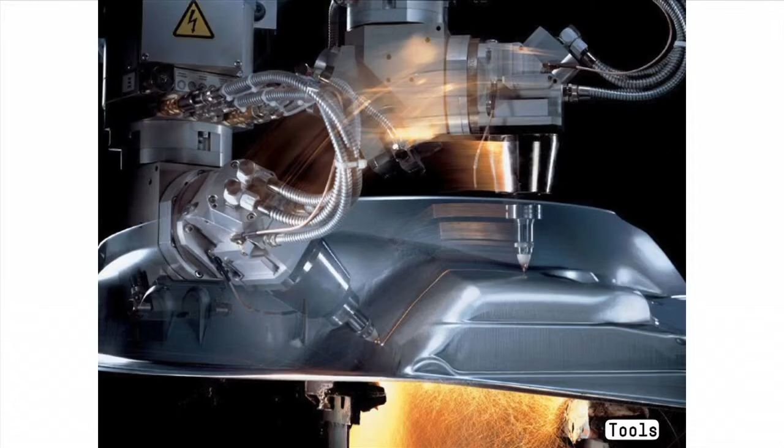To begin with, about 10, 15 years ago, as we were working in this sort of high-tech German environment, we began to learn more and more about the tools that were being produced in the factories we were building. This is an example of Trumpf, a machine tool company in Stuttgart that we were building for the last 10, 15 years. Their great invention was laser cutting of sheet metal, but also digital bending and punching, and we began to think about how we could use these kind of tools for producing architecture.

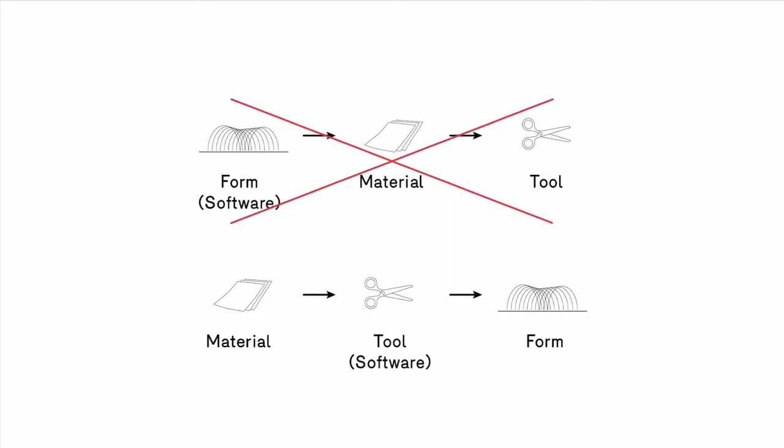So in a way, as I was sort of hinting at, there's this reversal of the process where when we were students at the GSD at Harvard back in the late 80s, when software was emerging, the process was working this way. You'd start with a form from software, Form Z and some of these things you remember, and think about how a form could be materialized in tooling. So the way we work now is really a reversal of this, where we'll start with the material, begin to look at tools, and many of these tools are sort of driven by software that would lead to types of form.

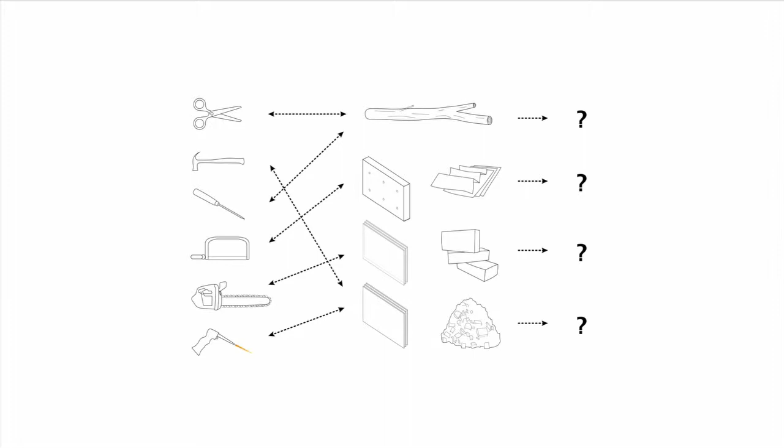So the idea was this, in this kind of diagram here, looking at different tools, beginning to anticipate how they can, in a sense, transform or manipulate materials and where that might lead us to. At the same time, we keep adding fabrication partners. We started with Trumpf. In the meantime, and in relationship to particular materials, we keep gathering different fabrication partners that help us understand what their processes do and how we might, in a sense, exploit these or begin to use these for architecture.

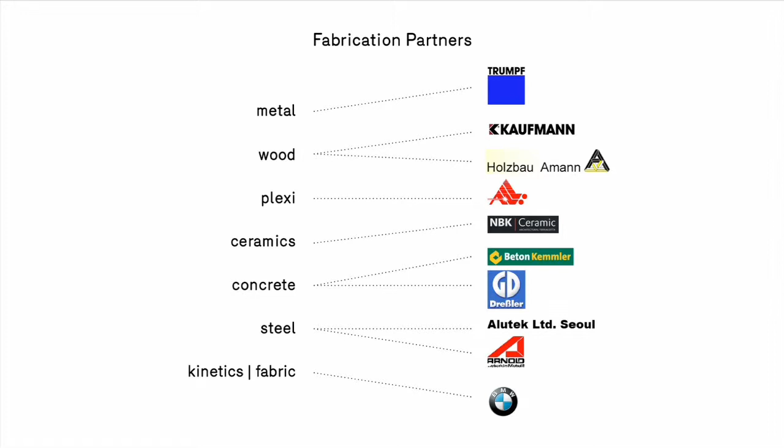At the same time, some London-based, German-based engineering partners, we began to work with them very closely, and particularly up front in the design process, where we're working with these guys very much at the beginning of the process. In order to do some of the more experimental work, we've also acquired a number of different institutional partners who have helped in terms of, say, collections or even the exhibition that we have here, installations, gallery expositions in order to test different sorts of ideas.

As indicated, this idea of the Atlas of Fabrication, which we did, I think this was about 3 years ago, we began to formalize a lot of these techniques into a kind of catalog. It's a catalog that we continue to add to. We're doing the second edition of this in a few months with the AA. But the idea is not to show buildings per se that we've done, but to focus more on different process techniques and how these might become an archive.

So this was work that we did with students. We would send students off to different companies. They would look at different material processes, in a sense beginning to archive this work, or to become our own sort of experts in terms of producing building catalogs that we could use or not use depending on the projects they can contribute to. So yeah, as an American architect, this was very different than the way that we were trained, where we were using building catalogs basically to add to the buildings that we were making.

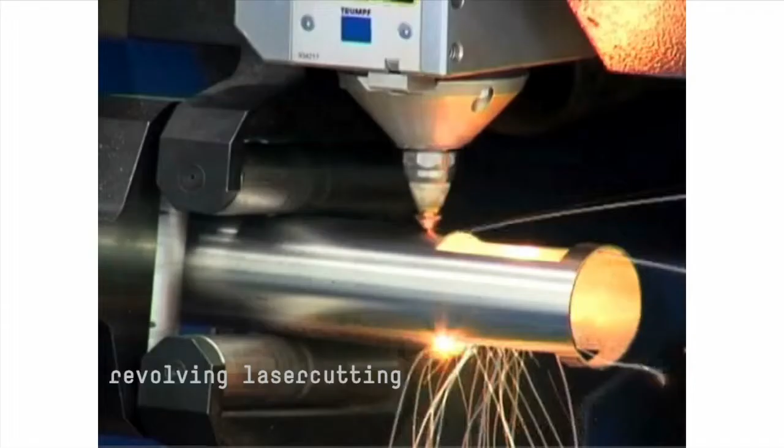So to give you an example of one of these processes, revolving laser cutting is something that Trumpf developed about 6 or 7 years ago. These are pieces that are upstairs in a way. These are, again, students coming down and really just experimenting with these machines to understand the capacity of these machines, how fast they can cut, how much detail we could acquire, to begin to understand the economics of some of these cutting, and then to slowly begin to think of applications for this.

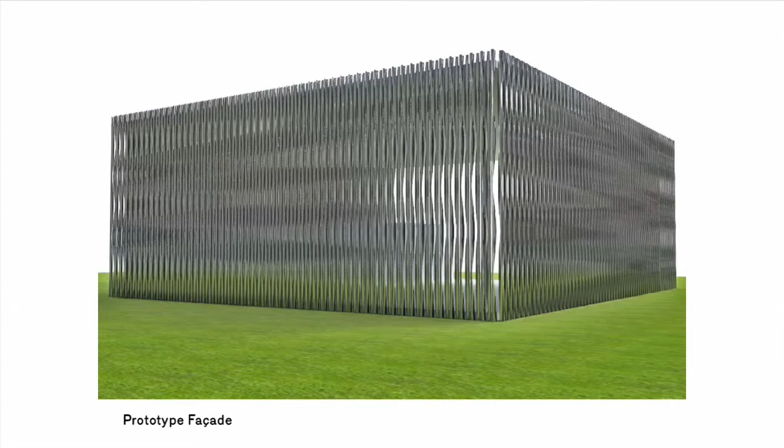So in this case, we constructed an array of these cut tubes for an exhibition in Basel, in Switzerland. The next step being a direct application in a building process. In this case, these cut tubes rotating both as a kind of sun control system for a showroom in Sweden, at the same time having a formal performance aspect, but also as a way of showing the machines that would be displayed in this showroom. So this would be kind of a fairly compact process of how that might work.

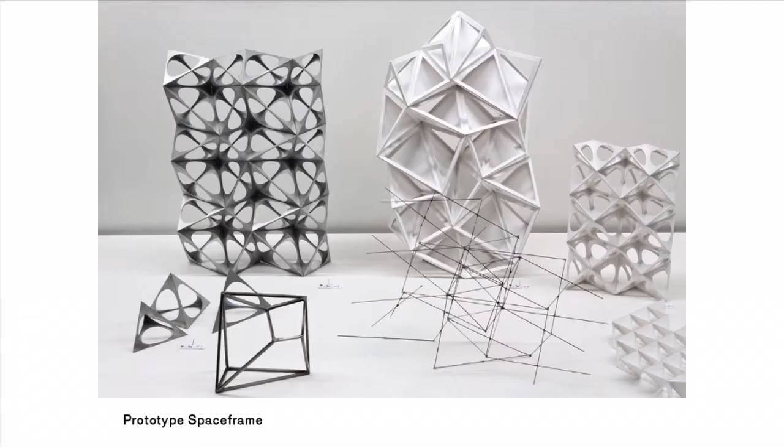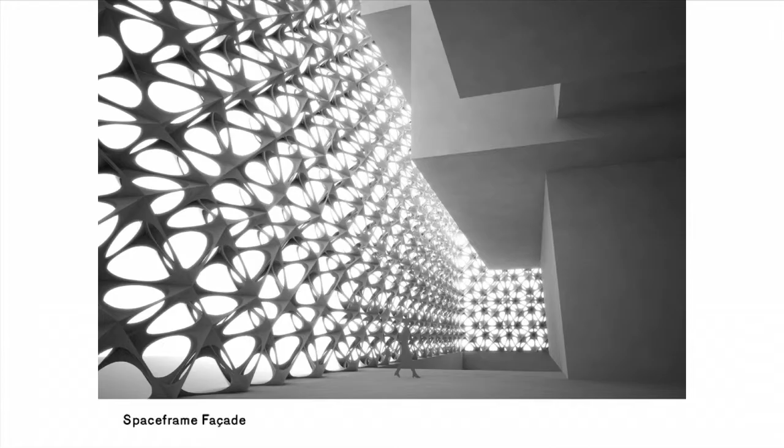Other examples, space frames. As I said, we're doing competitions in Europe, and one of the ideas is through a competition process to really embed some kind of a research project in each competition. So in this case, we went back to the 60s and 70s. We looked at how space frames were produced. Now these can be done parametrically. They can be done through laser cutting to produce, in this case, a study for a space frame facade for the Kunsthaus Museum competition in Zurich. But again, as a way of having that as a kind of project within the larger project of the competition.

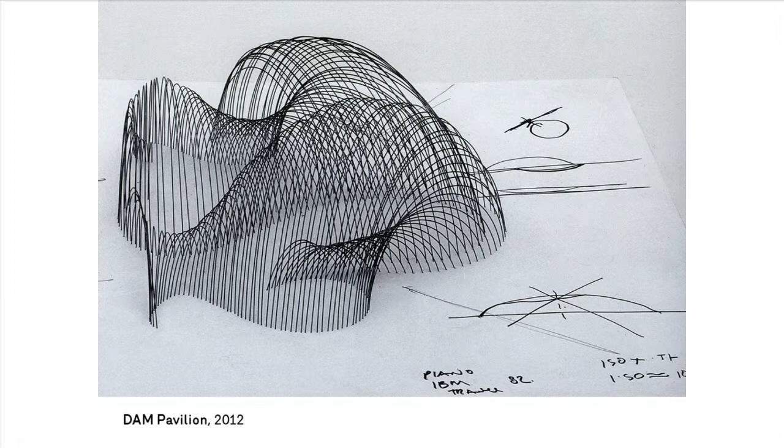Another thing about this time that we discovered with the laser cutting was that they could laser cut in a kind of spiraling cut that would lock these tubes together at the same time, could produce a radial system that we could adjust. So knowing that, we began designing different forms for the German Architecture Museum, for a pavilion for them in their garden, knowing that we could, in the end, use digital bending to produce a whole array of tubes at different radiuses that can contribute to these forms. We ended up working with Werner Sobek, making the forms, looking at different versions of those, and then thinking about how we could clad this system.

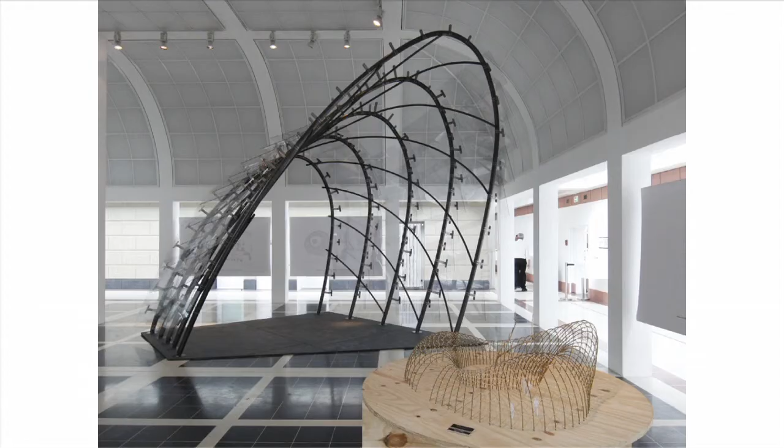In the end, Werner developed a system, a kind of polycarbonate shingle that were attached to these sort of standoffs here that were then simply and very quickly attached with Velcro connectors for a pavilion that we could build in the garden. This being the museum at the German Architecture Museum by Ungers, and this showing this sort of shingle overlap, which were then later embedded with photovoltaic cells for the piece.

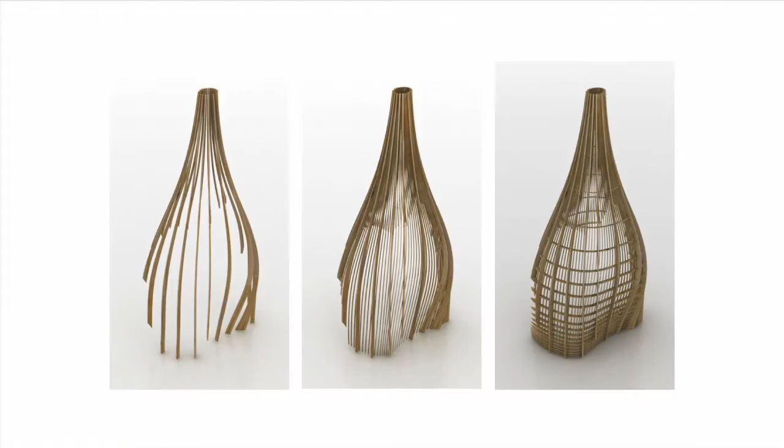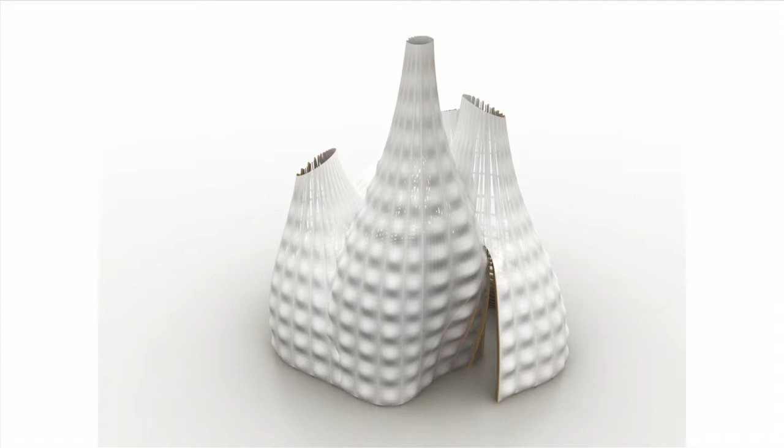Another test about this time was with wood construction for a pavilion in Norway, using the Norwegian wood industry to produce CNC cut ribs that could produce a series of cells for a Norwegian artist, which she could use and add to over time. The idea, working with this system with Holzbau Amann in the Black Forest, was a series of cells that could be clad with different ideas for membranes, either ETFE or fabric cells, of a system that we could add to and change relatively quickly for this exhibition.

So in this way, it was a very simple rib system with cross bracing through this, but with the idea of the cells being overlapping conditions. The pieces themselves, she could use these spaces for different kinds of installation having to do with the senses.

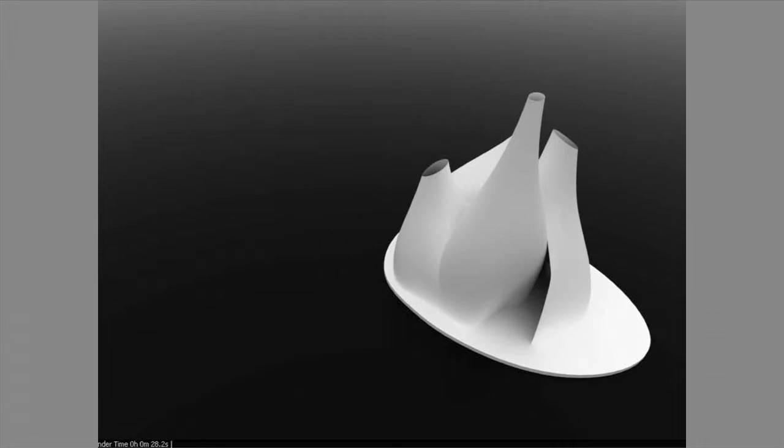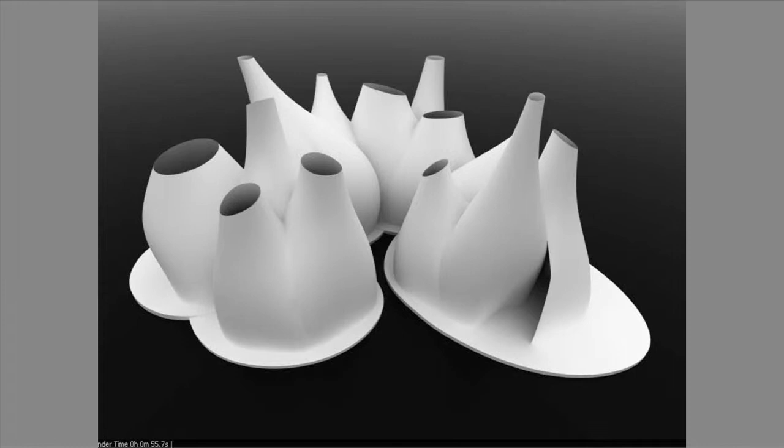The idea was that every year there could be another cell added to the project, so that within 5 or 6 years she would have an entire array of these pieces that would be interconnected to each other spatially. So the idea of the cell in a way as a kind of one-off, but one that could overlap and be connected to a much more integrated and, in a sense, integral system.

At the same time, and this was a discussion we had in St. Louis, I guess, in the spring, was the idea of patents, where we actually end up inventing components for certain projects that have to do with our prototyping. This, in this case, was supporting our friend Tacita Dean, who did the project film for the last Tate installation for the Unilever series. In this case, Tacita has a commitment to analog film.

At the same time, she was interested in the idea of using masks in an analog camera to produce certain effects with this project film in terms of overlapping of images. As you see indicated here, even in a way sort of rhetorically showing the sprockets on the side, would talk about this kind of history of analog film.

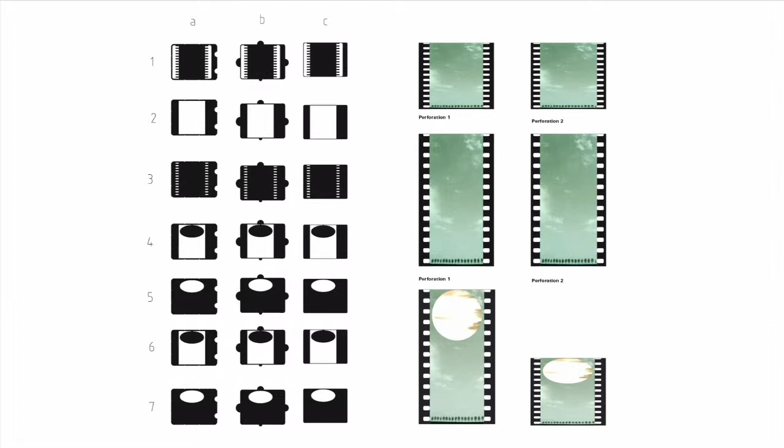In our case, to support her, we developed a series of 3D printed film masks that would slot perfectly into the camera, that would allow her different techniques for masking or revealing different kinds of images. So this is the piece, which is a kind of plastic 3D printing, which you'll be familiar with, which were then painted matte black and then could fit, sort of slot into the existing camera frames in order to produce these effects.

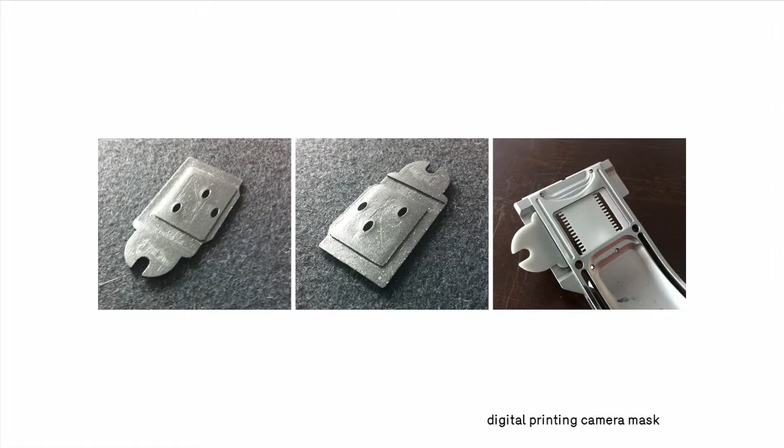The next part of the presentation, I think we're kind of okay for time, probably. Fine. Brilliant. Fine. Okay.

For example, I think in 2007 we finished this project in Korea. We'd never built in Asia before. It was a completely foreign building culture to us. This incredibly interesting, very heterogeneous city and how we might work there. Because we were building in a new master plan that was literally being built before our eyes, we became interested in how in a kind of core and shell building, an office building,

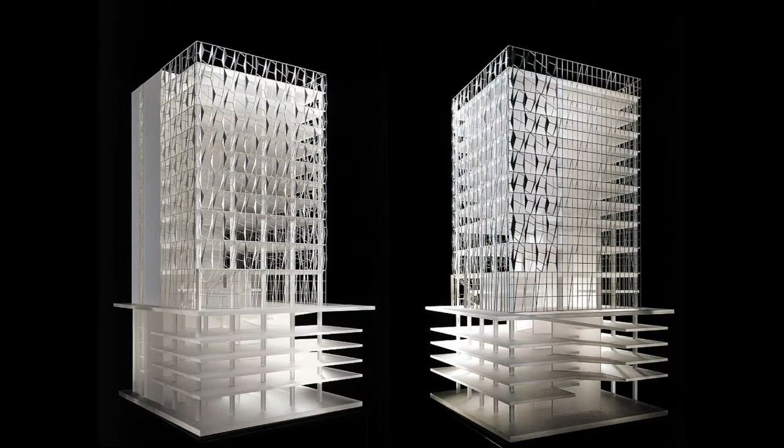The building itself that we were going to marry this facade to is a core and shell building with an offset core here in the corner, underground parking here, and then a facade on a steel building that we could simply wrap around it with showrooms on the lower levels and offices above, and then continuing the facade above to produce a kind of roof garden.

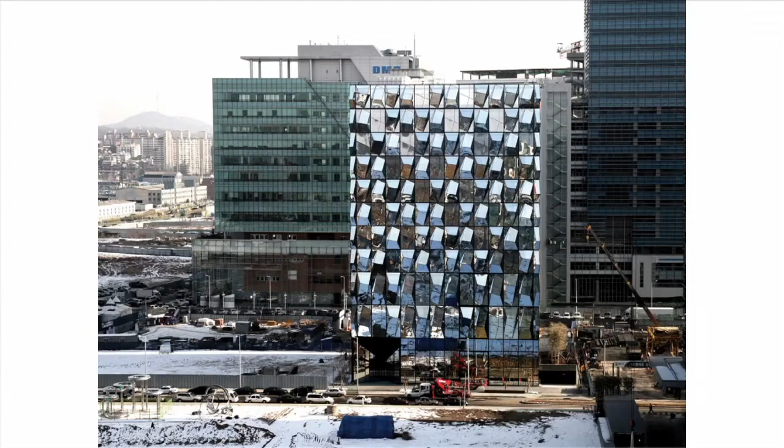So here's the building here. Here's this master plan that's literally being built from left to right, one lot at a time. And then this is the context, which we had very little idea what it was going to be, but with the idea that the building would react to these new buildings around it, whatever came up, as well as traffic, people moving around, the weather, whatever.

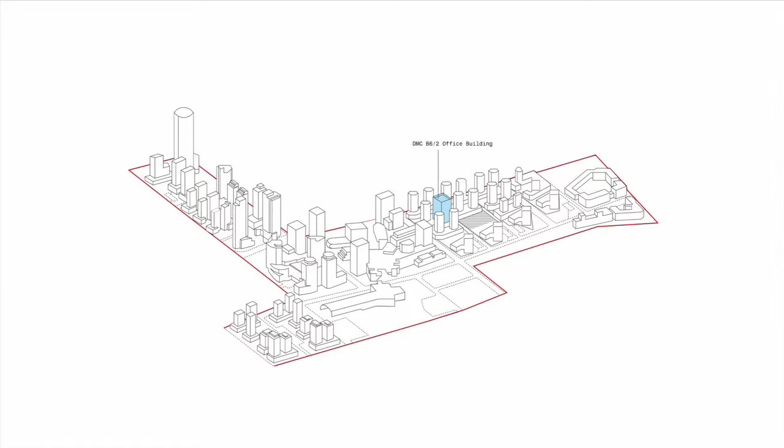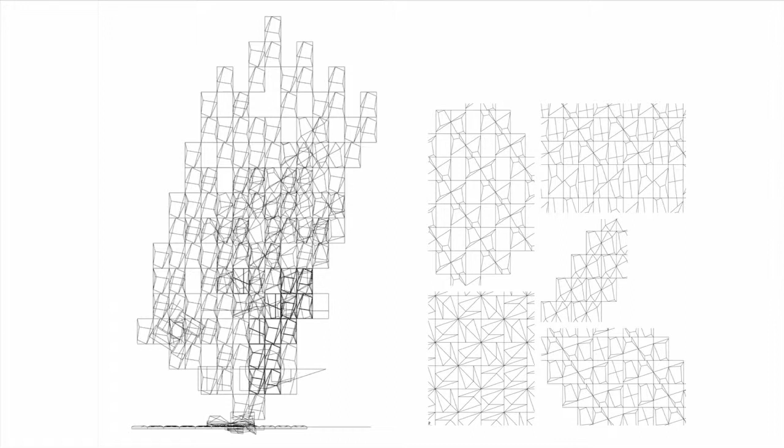So the building here being located here again in this fairly sort of mashup of a master plan in northern Seoul, and then begin to look at ways of using limits of glass. The glass is from Viracon, from Minnesota, from the US. We knew that we had a limit of the format, so we began with a grid, began introducing diagonals.

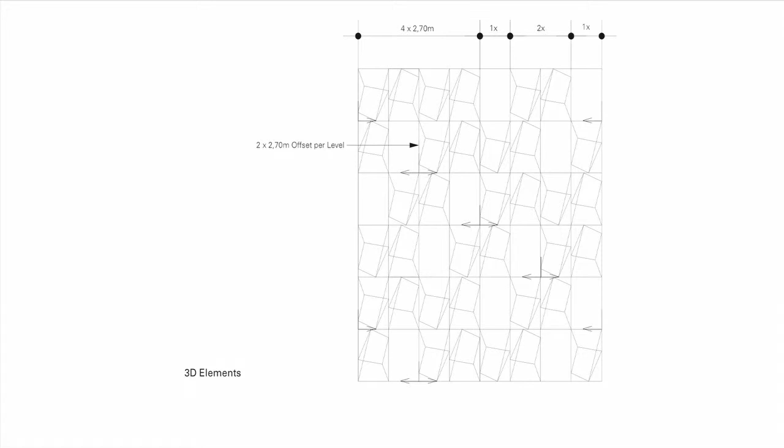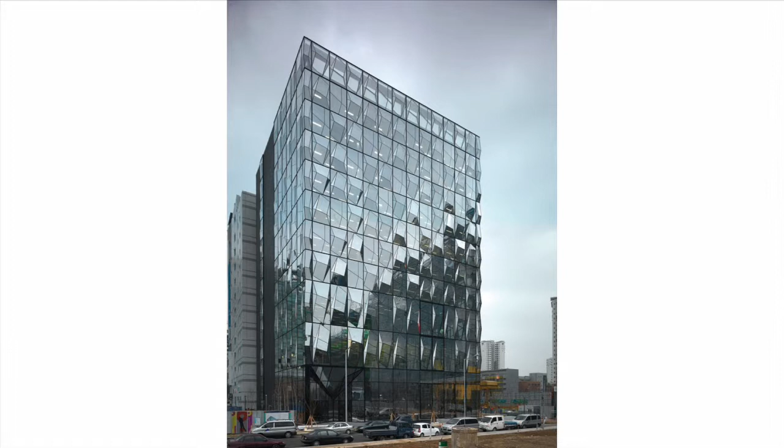Then the next move in this system was combining, and this also had to do with the economics of the project, but combining three-dimensional elements with two-dimensional elements that allowed us a huge amount of variation in the facade, while at the same time using really only 2 types. One like this, a three-dimensional type, which we could then flip upside down, and then combining that with a two-dimensional element to create a highly textured facade that works sort of optically very dynamically, but within a depth of only about 20-25 centimeters in the whole piece.

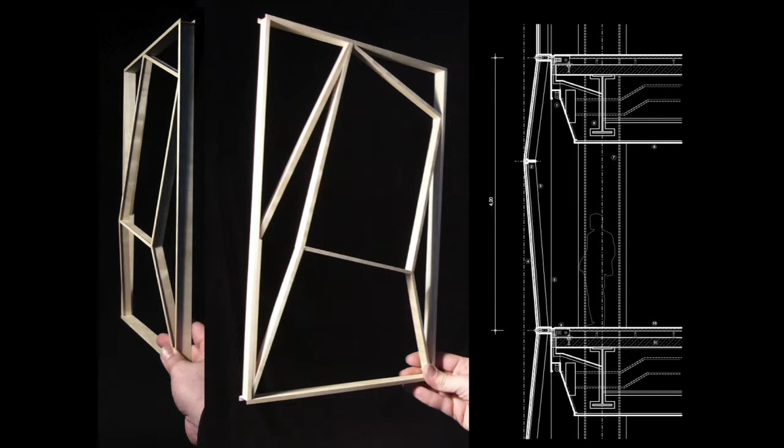Despite all the digital sort of working of this, we ended up going back to the shop and just producing wood models by hand, simply to understand the geometry and how these pieces could intersect, and how we could build them again relatively simply, and then combine them with glass elements that would fit in here. So this is again the kind of section depth that we were working with. Again, we were very interested in the history of curtain walls, how we could produce that for a low E reflective glass, and then how we could control the geometry.

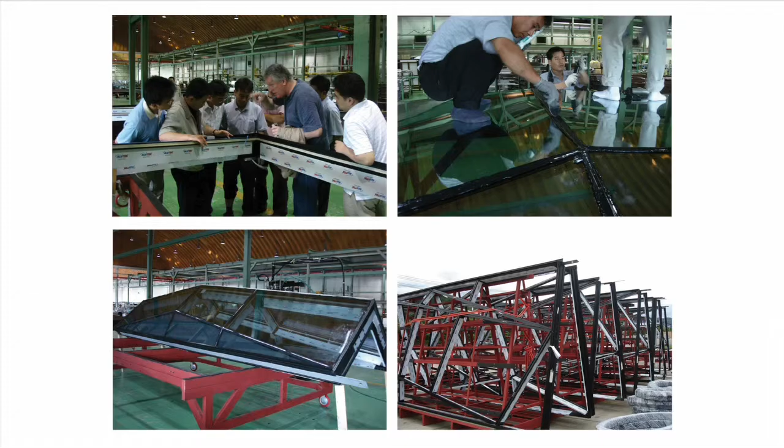We ended up working with Arups Hong Kong, who in a sense did workshops with the local fabricators. Jerry from Arups doing workshops in terms of controlling quality, tolerances, and then bringing the US glass onto these frames. So very high-tech CNC cutting versus very simple sort of kitting of those joints for silicone. A combination of, again, what was sort of at hand, what made sense in terms of producing this, being one of the more complex corner units that we produced. But I think there's both the ambition and the kind of will from these fabricators there to do something like this, in the sense that there was no precedent for this project.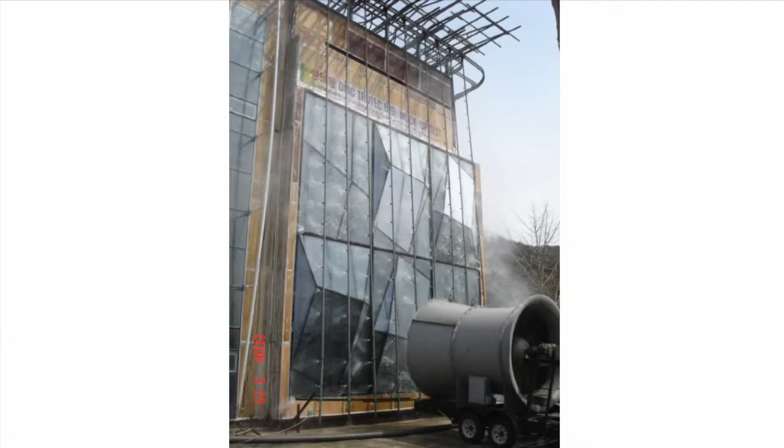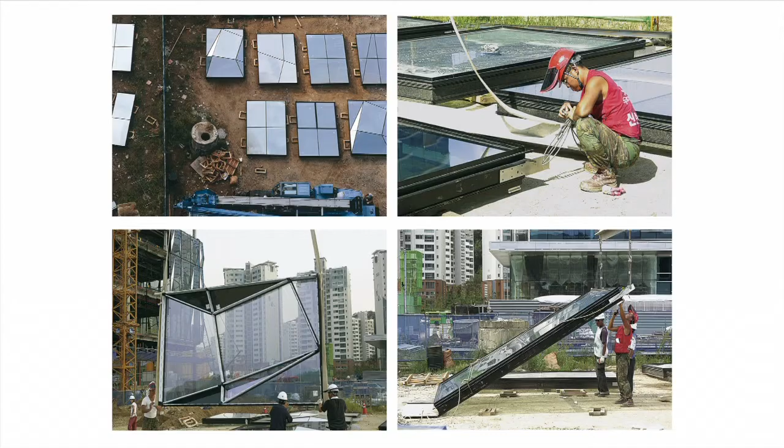The client asked us to test it, which we did, in terms of wind and thermal insulation, waterproofness. The first prototype passed, so we were given approval, and then could go into production in terms of prefabricating these things off-site, and then bringing them on site so that they could be lifted in place, even though some of them are quite huge, but we could lift them in place very quickly. So again, a Korean construction site where being on time, on budget was extremely important, like everywhere else, but they were able to do this in a very expedient manner, to produce something for us which was quite extraordinary, both in its appearance and even in the precision of how it could be produced. Again, a kind of technical solution at the same time.

We were very much aware of the effects this facade would produce, how it would react to traffic, to movement, to changes in light and weather, or even the insane window washers, which sort of drop off this thing. As well as different projects. I think another idea was working at different scales within the project. So we were working on wood cladding systems on the interior, a suspended steel stair that we engineered with Schlaich Bergermann in Stuttgart, but different sort of emphasis within the overall project.

Having done that, we went back to Stuttgart to do a couple projects for Trumpf. Again, this is this digital fabricator, the machine tool company that we started with, where we did a gatehouse for them, which was our first chance really to do a building that would, in a sense, embody all of their technology. We went back to Werner Sobek's office, and Werner had been dying to do a building with an insane cantilever. We had columns over here, which he just knocked out literally of the model and said, we're going to do it like this. So our first column grid is back here. The other one's here. There's a gigantic chunk of concrete in the ground to keep the whole thing from tipping over. And then produce this 60 centimeter depth steel roof truss.

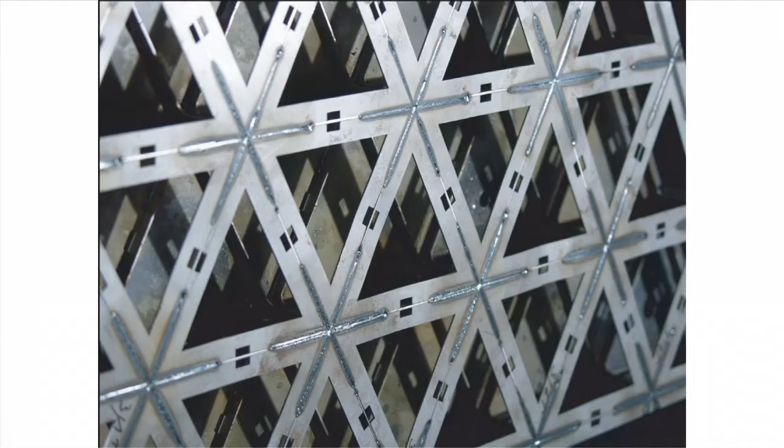To begin thinking about that, we knew that Trumpf were producing these things for ship decks and tables. This is laser cut and laser welded. It's an extremely stiff, extremely strong building component. So our idea was, well, maybe we could take this technology and scale it up to the size of a cantilevering roof, which was a lot easier said than done. We inherited these sort of diagrams from Werner's office that showed the loading.

We wanted to make that both a structural idea, but one that was also legible. You could read that through the construction. So at the end of the cantilever, you have a very light structural grid triangulation, and then much more compact at the compression, tension back here.

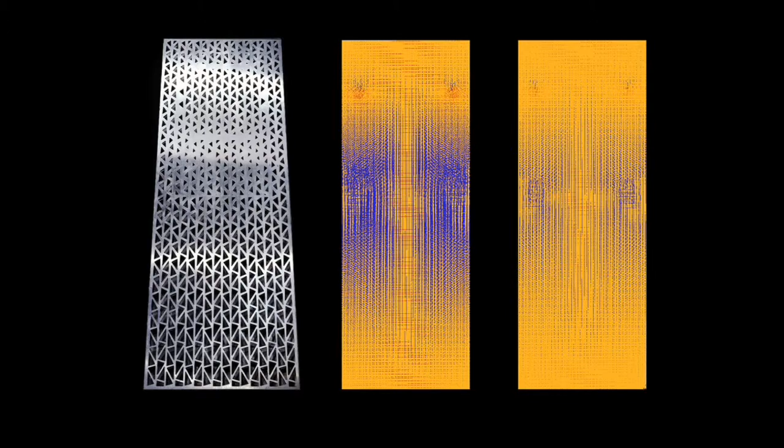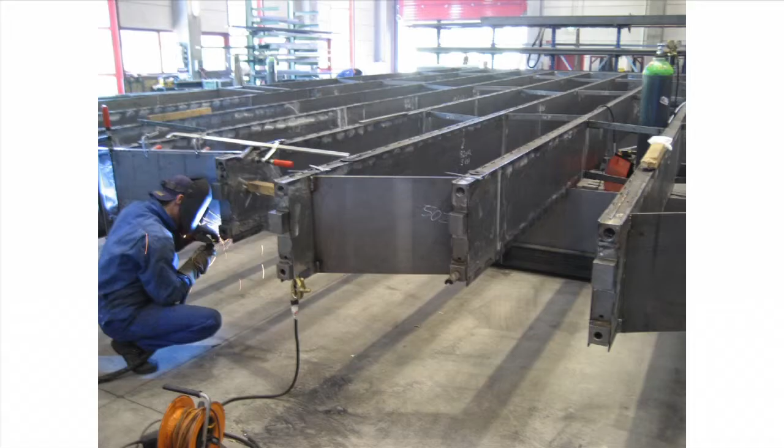And then again did a mock-up of that system. So the bottom plate is varying, as well as the sort of webbing here. These are also changing in dimension, integrating things like the gutter system, but then combining different sort of trades in terms of laser cutting at the same time, good old hand welding at the expansion joints here, mechanical fabrications.

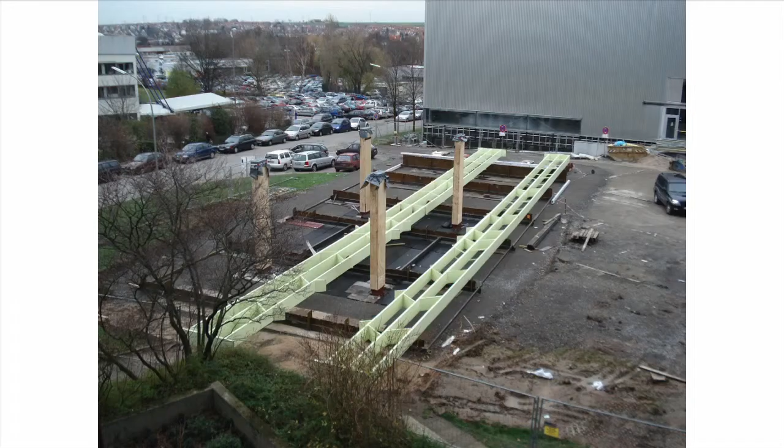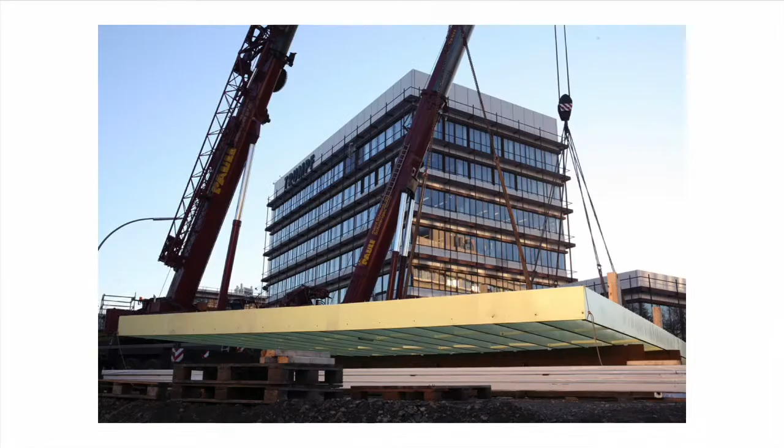And then ended up pre-fabricating the strips off-site, brought them to the site at 3 o'clock in the morning with these gigantic lorries, had the columns already set up, and then very quickly sort of bolted these pieces together, put these gurneys around them, and then lifted them into place over a very short period of time. I think we did this all in about half a day.

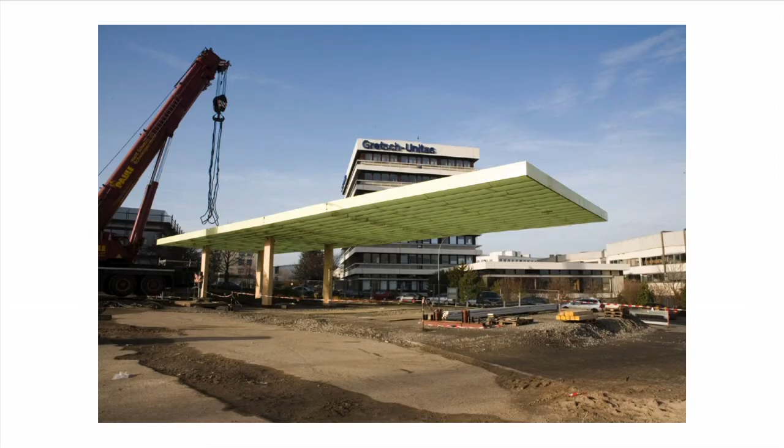This was sort of the moment of truth. Dropped the thing. The roof bounced a couple meters up and down, and then slowly settled into place. All 2,000 workers are out watching this happen. So we felt like Mies van der Rohe smoking a cigar while the National Gallery was lifted into place.

So in a sense, that was very much the experimental case with the building. I mean, something like this you can calculate it, but it's extremely dynamic. We had a camber going this way, a camber going the other way, and then in the end put sandbags on the roof to drop it into place, and then use the entire roof as a kind of indirect lighting scheme. In a sense this really is the gateway, this threshold to this sort of factory campus.

But again, like this other project, developed secondary systems in it. This is a traditional way of making, it doesn't look very fast, but it's a traditional way of making garden walls in Germany. We interpret that as a glass double curtain wall with a kind of decorative perspex tube infill, which also works as sun control.

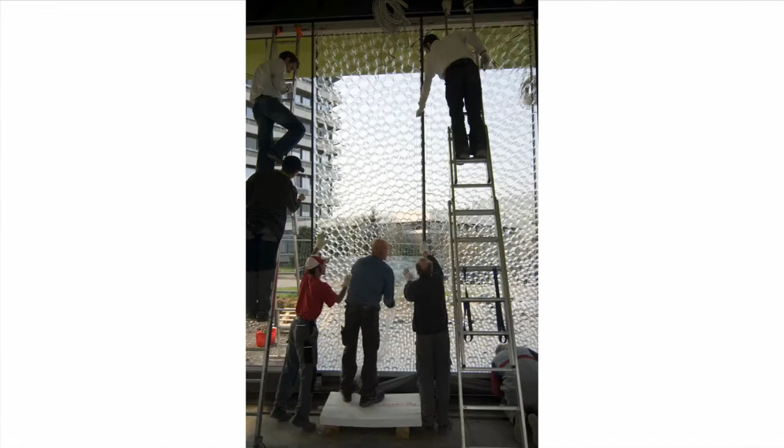This was done in, as I said, a facade system that's entirely glass. It's either acrylic or float glass, this being also acrylic, so that the entire facade is either transparent or translucent, depending at which angle you look at it.

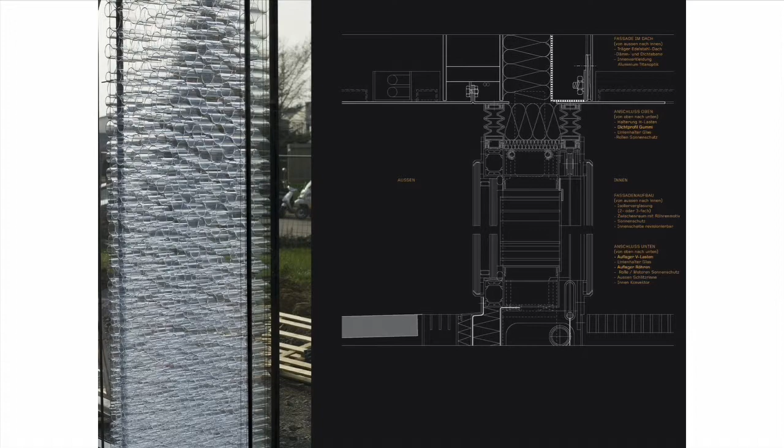At the same time, we did this project for Trumpf, the cantina. This is right down the road from the gatehouse. In a sense, this is the social center for the campus. This is where the workers, white collar, blue collar, everybody comes here for lunch, but also for lectures, for musical events. And to think about, I guess in the German sense, the roof as a kind of fifth facade that we can articulate. This is the structure of it.

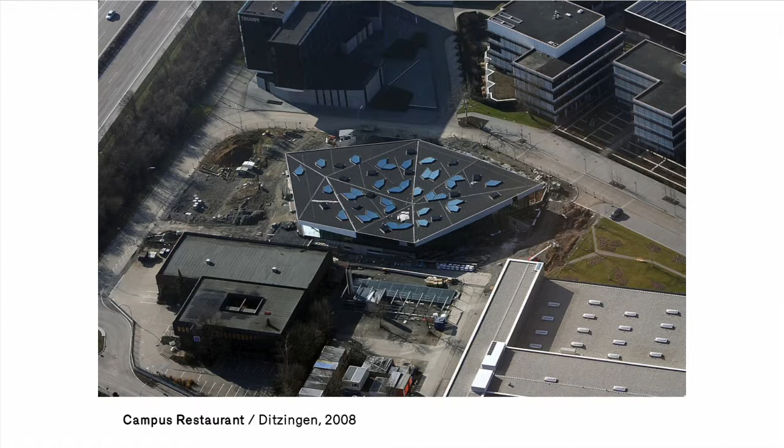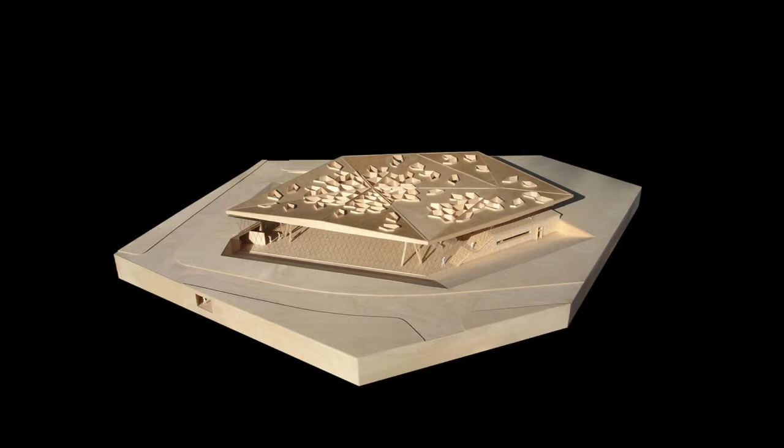At the same time, it's a filter for natural daylight, for artificial light, almost a kind of leaf-like structure that encloses the spaces. One of the things we did, which kind of goes back to some of our earlier projects, which were interested in landscape, was to excavate the site here to the level of the tunnels, which connect the entire campus, and produced a kind of amphitheater space under this large structure.

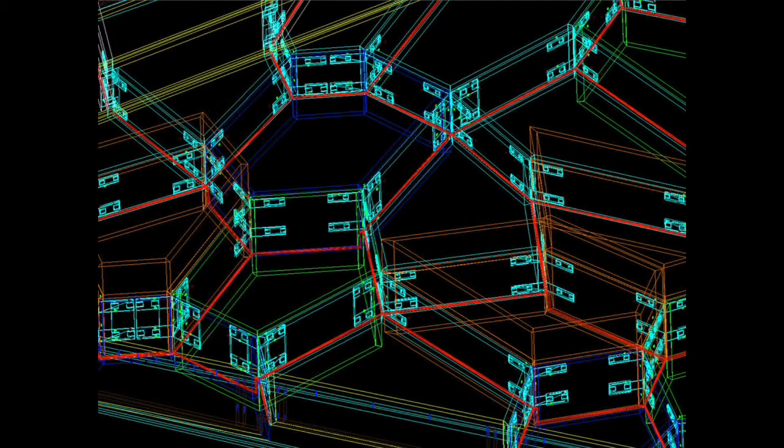We drew it. They redrew the entire roof, every connection, every bolt, every screw in their software, and then went into production. So this is Gunther over here redrawing all of our drawings on their hardware and then going into production. So this is a production run for us over here. On the other side, they're running Shigeru Ban's Pompidou project.

Had built a prototype of that system to show the connections, to show the finishes, to show the economics of this. We kept dumbing it down, making it simpler to the point where the prototype itself was integrated into the building itself.

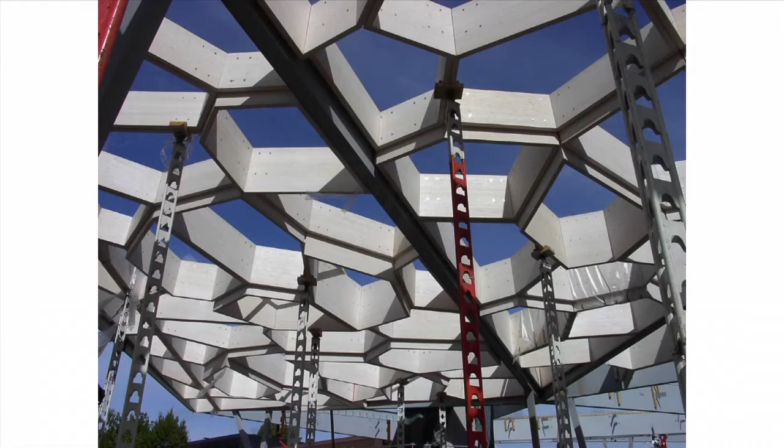So here's the fabrication happening with the CNC technology. There's very, very little redundancy in the geometry, unique conditions. The depths relate to the structural loading. Used a steel sort of mainframe for this to get the spans that we wanted to get. Brought these all pre-cut and then were staged.

These are sort of little helper columns here. We're able to put this up also extremely rapidly. So every 3 or 4 days we could add another section into this kind of polygon-shaped roof to finish it very quickly. So this could go into operation also quickly.

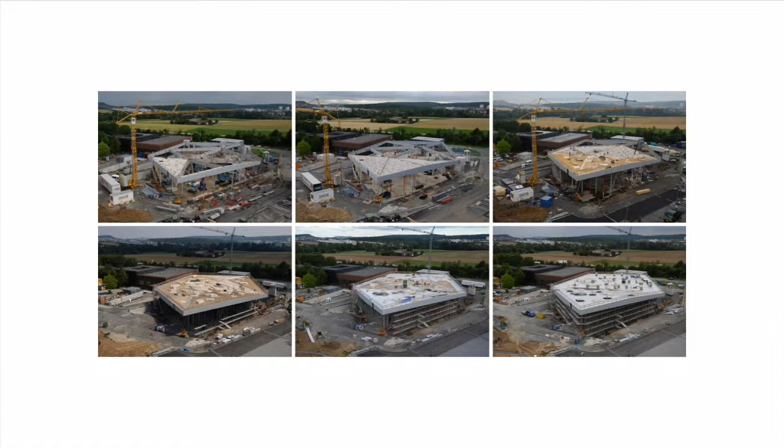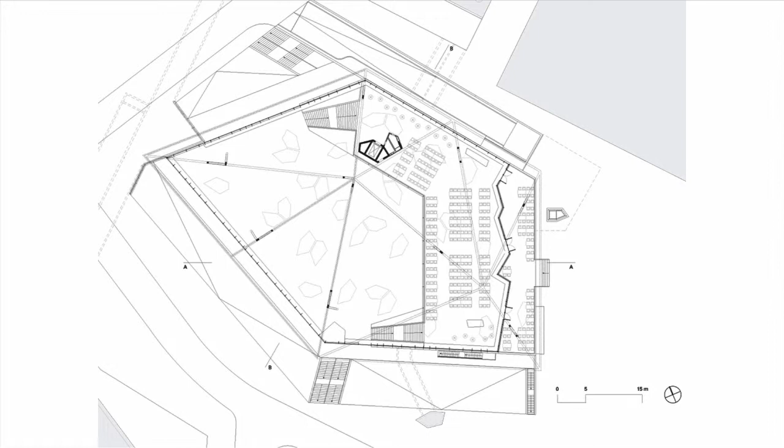As with the other project, we ended up designing a curtain wall system for this one also, but a fairly simple plan with these series of column clusters, which are triangulated to stabilize the lateral forces here. By going underground, we generated a mezzanine here, which went into use right away. A very small core here, which also stabilizes the building, and then precast stairs, which complete the kind of main structure.

As said, these cells could be programmed. We could target each one as we needed. The darker ones are skylights. The lighter colored ones are artificial lighting, and the rest then designated for acoustical surface, so that each cell had a kind of role to play in the overall structure of the building.

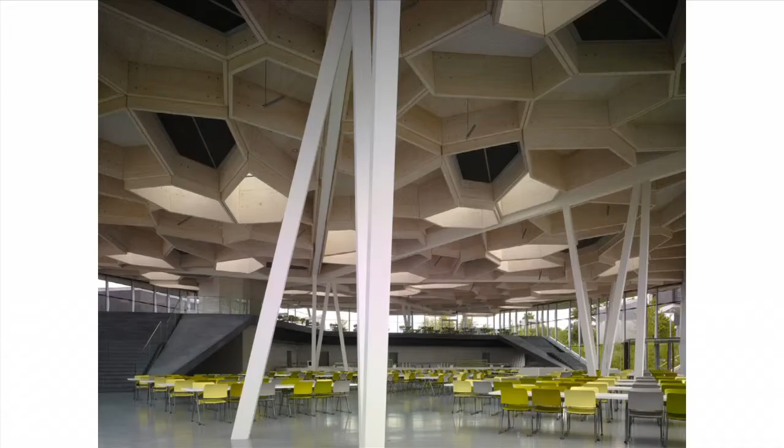So this is the effect of the roof in terms of the lighting, a very flexible space, the mezzanine with precast concrete stairs to the top, and then the facade system that we developed up over here. So it was an interesting building for us. It was also for us very experimental.

Also working with Matthias Schuler from Transsolar. Ideas about sustainability, timber as a sustainable material, but also in terms of the heating and cooling of the building, as well as 90% of the time being able to use natural daylighting for the spaces inside.

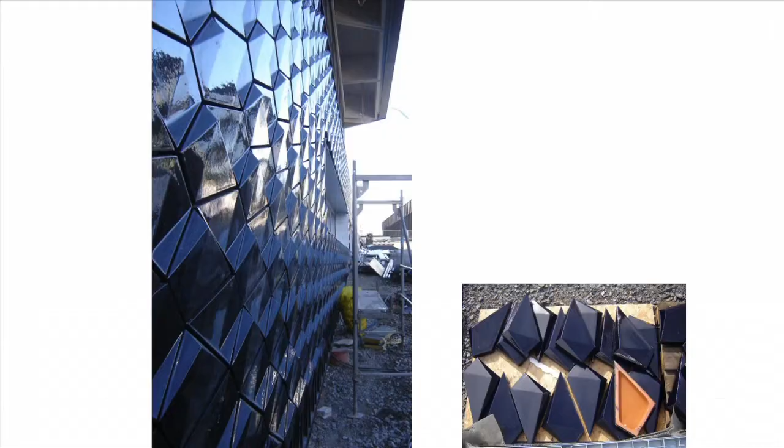As said, with this idea of a kind of complete fabrication project, we could control other details in the building, such as the ceramic tiles, working with NBK. They were happy to make a custom tile for us out of terracotta and glazing, so that, in a sense, for one building, we could design and produce the entire building systems.

I think the only things that were off the shelf were the door handles on the 3 or 4 doors in this building. But the idea of being able to relatively easily control all of the building systems, the architectural ones, of course, the mechanical systems are independent of that, but we were able to do that, which in our experience of building in other places like America, was almost impossible, to have that amount of control.

I just had a couple other projects I want to show at the end. One of the things we're shifting to now is concrete, and also with digital formwork. I think this is like a whole new frontier for us. This is a building we just completed a few weeks ago in Berlin near the main train station. It's the first building block in this master plan here.

This is one of the last really large patches of ground left open in Berlin that hasn't been developed. This is the government center back over here. So in a way, the building is extremely visible in the city. It was a kind of political football. There was a lot of attention on it. There were a lot of sort of dodgy hotels that had been built around the train station. So there was a lot of pressure on this building.

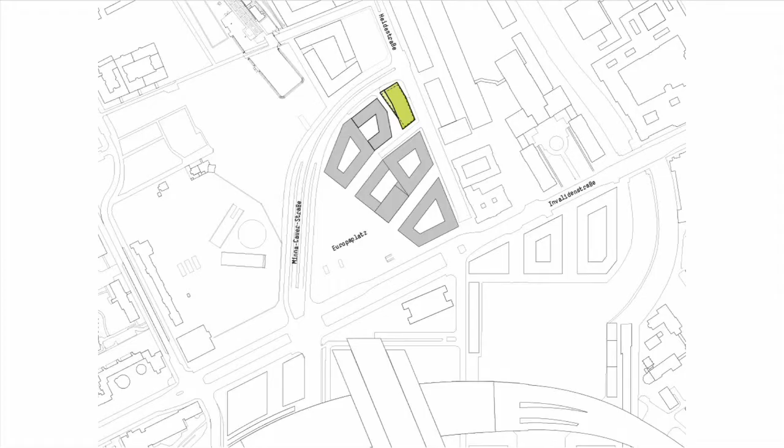The investigation here was not to do a curtain wall, but really to look at a load-bearing facade of precast concrete. This is the building next door that we're working on now as a curtain wall that will produce this kind of pedestrian passage. This is the main entrance to the building.

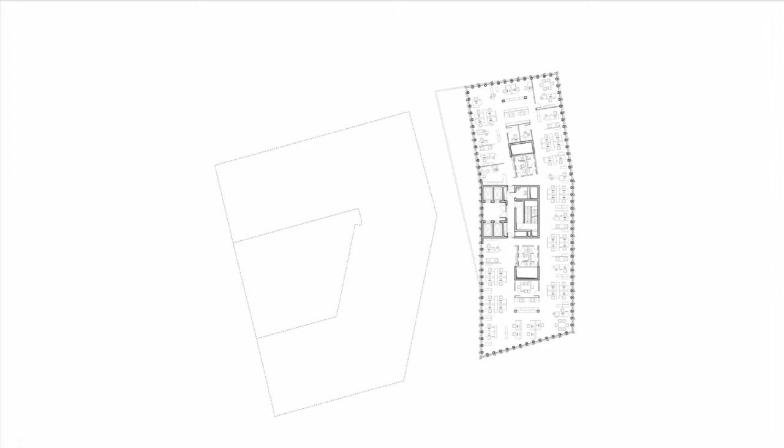But to produce essentially a column-free interior, the core is offset here to the west, and then a precast concrete, like a 135 grid that goes around the building to enclose it, to have well-lit, relatively shallow office spaces that would then produce this kind of visual effect with the facade.

So these are these precast pieces which are attached back to the floor plates that have a kind of geometry, which I'll show you in a minute, that produce these kinds of diagonals that wrap around the building, which gives it a kind of scalelessness. This is a precast element that's made in Stockstadt. These are the same guys that did the new museum for Chipperfield. So we knew they could produce something with an enormous amount of precision, with an enormous amount of color consistency, and produce them actually quite economically.

This ended up being an 800 euro a square meter facade, but also to use this depth, which is sort of a traditional way in Berlin of producing facades, particularly in industry, where you have a deep facade which, when seen oblique, is closed, frontally transparent. For a silver DGNB sustainability, that means that we have exterior sunscreens integrated into this, triple glazing, and then a mechanical level at the top.

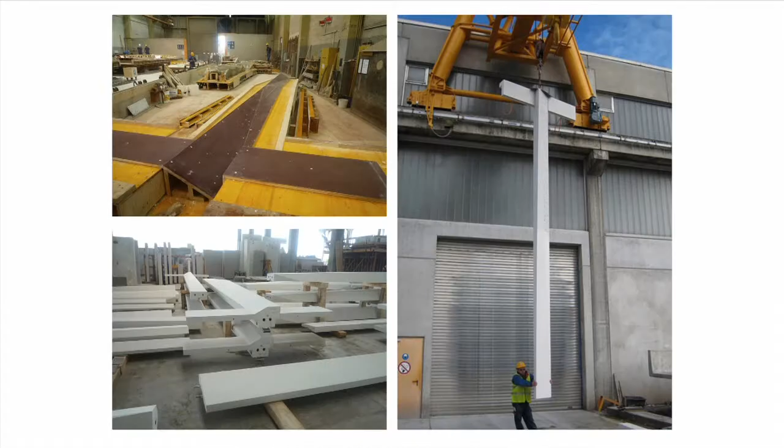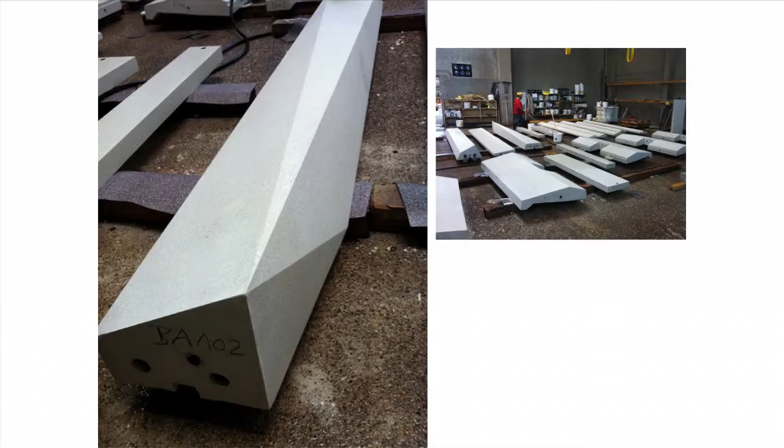In order to do that, and also with the city, we did workshops for the city. We produced a mock-up of this facade. The city could see the precision of it, optically how it was good, and we could go ahead with this. So in this case, we're now using digital technologies to produce the formwork. Although there's a lot of redundancy in this system, we still ended up having, I think, about 160 unique pieces within this whole puzzle of putting these things together. But they're extremely precise to a couple of millimeters. We could also get a very beautiful matte finish that they did with a kind of acid wash on these components, and then put them together.

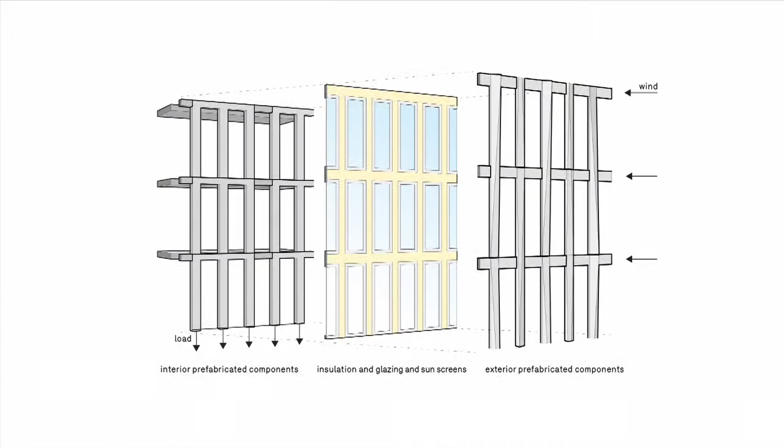The system works as a kind of sandwich. We have precast on the interior, precast ornamental pieces on the exterior, and then a kind of thermal glazing component in the middle. In the future, working with Zipline, we'll try to eliminate this layer, and we'll take this one as a kind of exoskeleton and connect that back to the floor slabs with an Isokorb connection. So that's on the table for the next move with this. We had too much movement, 70 meters high, quite a lot of movement thermally, but that would be the next process in this kind of development.

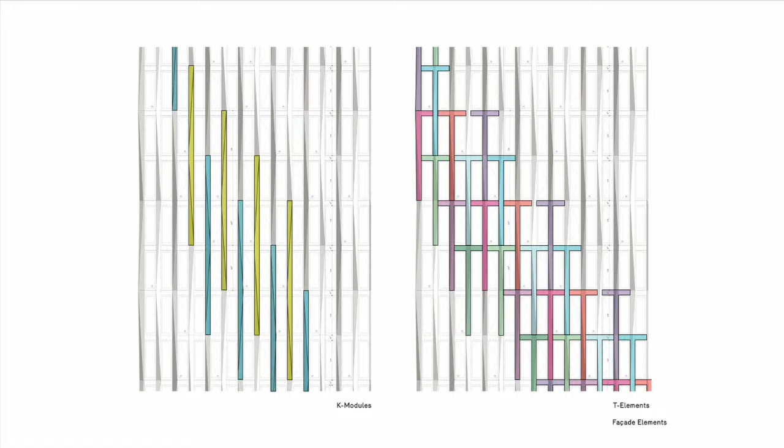Formally, the T's offset with each other. They stagger to produce this kind of effect. There's a so-called K-shape, almost like an origami fold that works over 4 stories. These pieces are ornamental, but they also provide the lateral support for wind load. They stiffen the frames behind, so they did have a structural component.

In either artificial light or oblique light, you get probably the strongest effect in terms of the geometry of the facade as a kind of wrapping quilted surface, but compared to say Korea, a much more physical, much more material, less optical kind of surface that for us was an interesting way of looking at this raster facade or this gridded facade, which is a kind of Berlin typology, and how we could take that typology and evolve it through new technologies, new ways of casting, and new ways of repetition. So this has been an exciting project for us.

Like the others, I think also looking at custom tiles for the lobby, millwork and steel work that complements some of the systems to the exterior, but again being able to control this with local ceramic workers. I think we're gearing up for doing a ceramic facade on the next project, so this is something we're quite interested in also.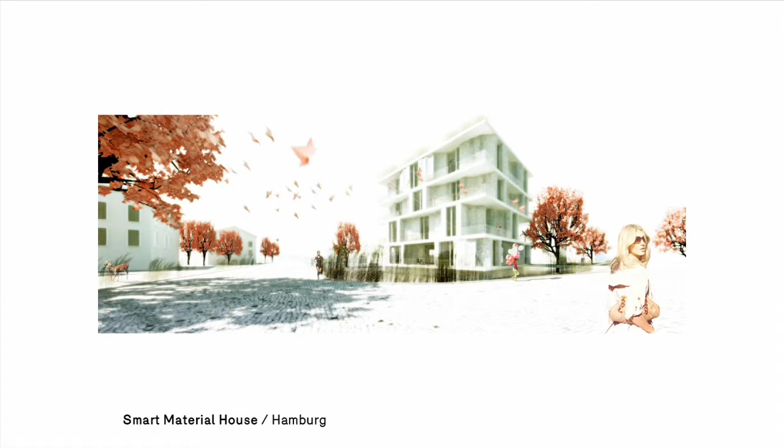At the same time, we won a Holcim Prize for the Smart Materials House. This is a concrete project also in Hamburg for the IBA for low-income housing. We could build these 4 levels of flats for 1.4 million euros. We work with Schlaich, and on this project also with Matthias Schuler. Schlaich's great interest is infra-lightweight concrete. This is a self-insulated concrete that can use either recycled glass or clay as a kind of insulating aggregate. It's a third the weight of regular concrete. We're using it at 60, 70 centimeters, so this idea of thickness or poché was an interesting one. And then using the decking, the tension pieces in timber and glue laminated pieces.

So this combination, again, like the diagram in the beginning, this idea of beginning with a particular material and seeing how we could use it. We knew, and of course we're fascinated, this is a project we did at the AA years ago, but the Eastern European Plattenbau, prefabricated concrete elements, this is Khrushchev, seeing how these things, which are, as you know, all over Eastern Europe, were economical housing out of precast concrete that produced an interesting amount of variation within those kinds of types.

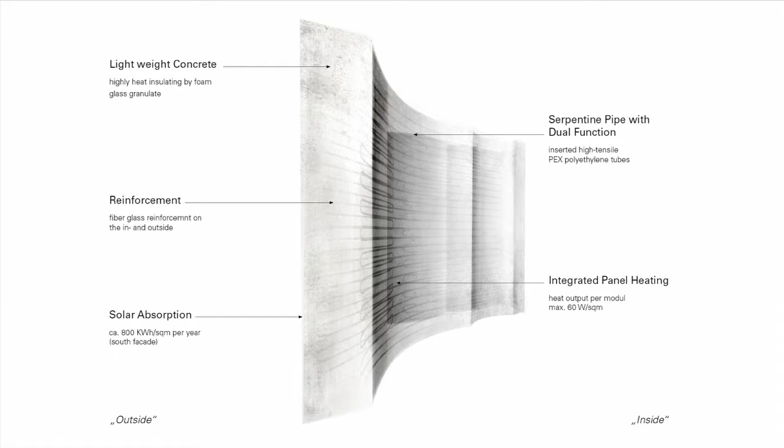So this was a kind of historical footnote for us how to work, but with the ambition of really producing a building component that could kind of multitask. They had a kind of formal language about them. They're serpentine, which also makes them self-supporting. We didn't need scaffolding. We could also integrate the heating and cooling in these elements. It's sort of one-stop shopping. The finishes on the outside, the inside, you don't need any finishes. You don't need any additional materials on it. It's done once it's cast.

We could combine these in a much freer floor plan. We didn't have the notorious sort of German cold bridge problem. So these wall pieces can stack over each other almost like a house of cards, as long as they have bearing along that lane. Very simple core out of concrete, or wood works also.

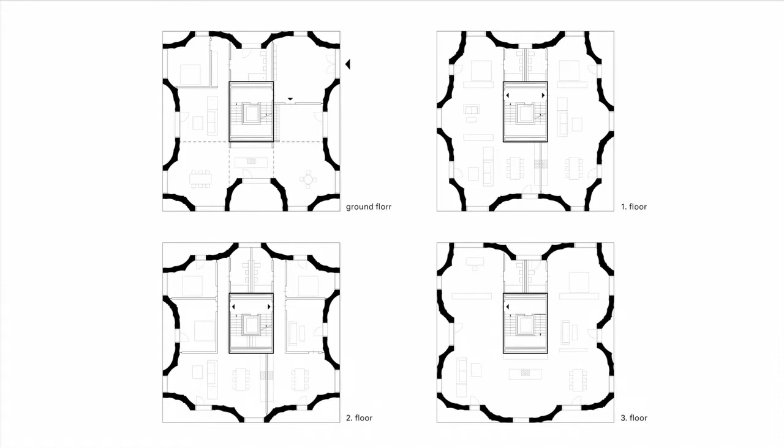So you can have, in this kind of nine square, an open plan as a loft, or it can be cellular and broken up as a kind of work-live space for this International Building Exhibition, so that the perimeter of the building through these things articulates the space, but also how the light comes into the space. So this is a configuration where it's very open. We combined that with wood and triple glazed glazing units.

This is the sort of interior effect that we anticipate with the system, this being the timber floor decks, ceilings, and the pieces themselves. Like the Korea project, we can take one or two different types. You can flip those types also upside down to get another one. We could pour them also at different heights. You could have higher heights or lower heights as needed within the overall height restrictions.

Again, seen as a prototype, it was built for a specific site in Hamburg, but we could also build it somewhere else. Particularly, it works quite well in these northern sort of environments, and with basically three components: the wall pieces, the slabs, and then a window component. So also with the idea of being able to produce this quite quickly.

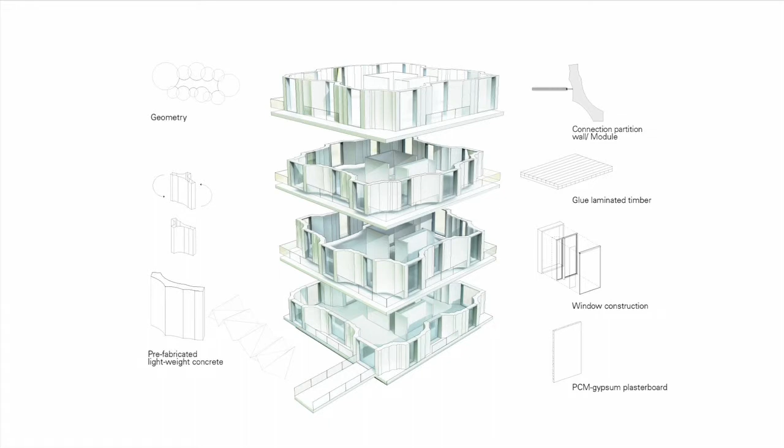So this is building this at a 1 to 20 model scale with our students in our studios out of a laser or a wire cut foam to show the system. But we could also see how stable it was, an extremely stable structural idea, but it could spatialize quite interestingly on the interior, as well as a kind of rippling, almost curtain-like exterior that would produce these little, I guess they call them cocktail balconies through here, but also really thinking about the project as a residential one. So we also scaled the building accordingly for people to use as a low income, low cost, live work space.

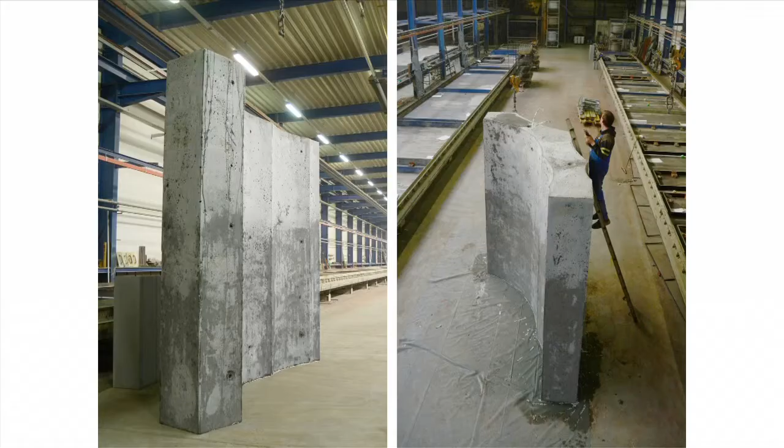With Holcim, after we won the European prize, they gave us enough money. We took the money and with a research institute in Stuttgart built a one-to-one mock-up prototype of the system here to see how it would work, to see what its appearance was, how we could sandblast the surface of the building, and how these things could combine. So this then in turn allowed us to win a global prize with Holcim to the next level, which again finances the next level of research.

Right, if you could wrap up now, you're a bit over. I'm right there. Okay. Yeah. Thank you. This is the last thing to show, but okay.

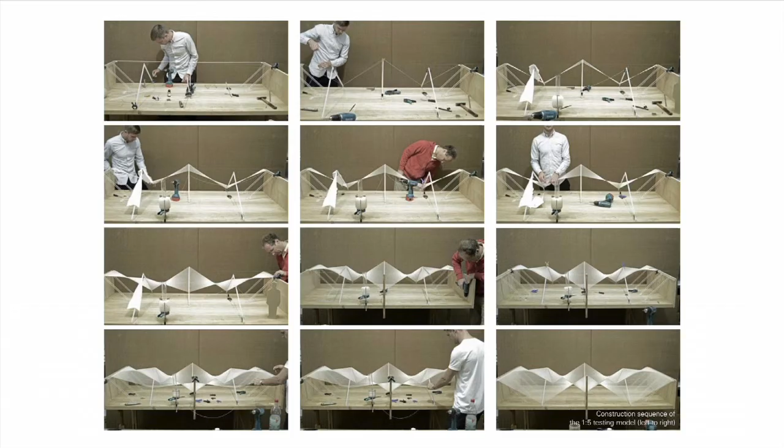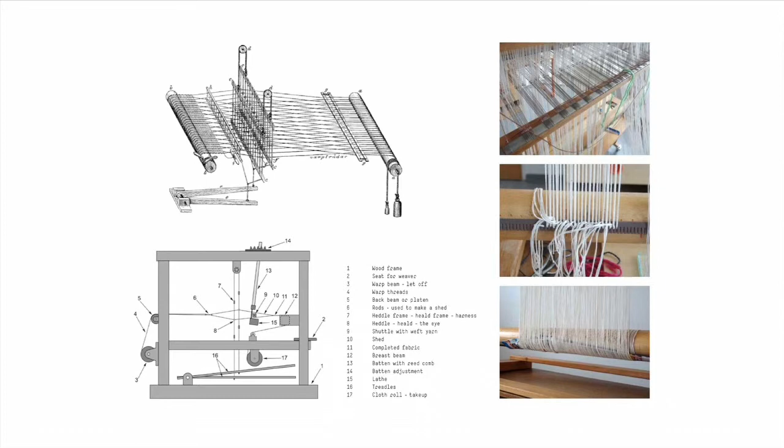This is an installation we did in Marrakesh for the Biennale last year, which is seen as a kind of prototype for a roof system, a hyperbolic system. And I think the interest here was, this we did with our AA students in the office, that we looked at the software that produced a hyperbolic surface, but then looked at how that could be translated through local craftsmen and materials. So this is the project being constructed on site with local craftsmen, local wood elements, and Jan's system. This is Hamad, one of our workers who led the crew that produced this particular structure here.

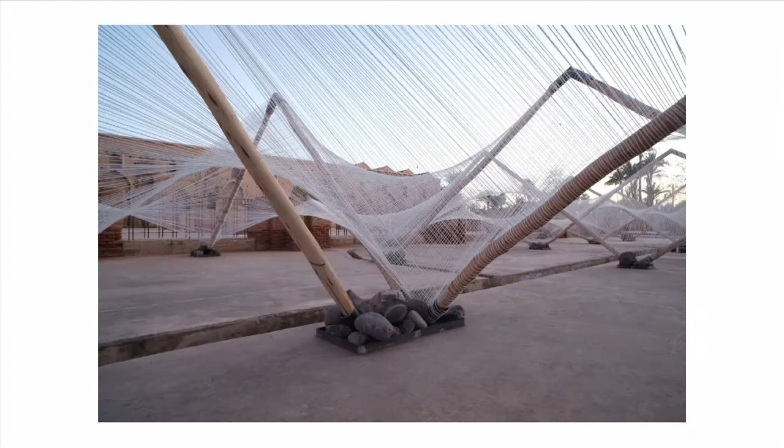Again, as a kind of installation there, but anticipating this could be an industrial project for us. It could be rescaled. We could build this in the north in wood and steel, cable, as a test of this idea, how it would spatialize and how it would fit in the context of this particular installation and its effects in light and in this place. So I think this idea of a kind of digital investigation, how that could be interpreted on the ground through local materials and craftsmanship.

My last slide. As I said, this is an evolving project. This is something we keep adding to and will continue to add to, but simply as a way to show how we work. Thanks, I'll finish with that.